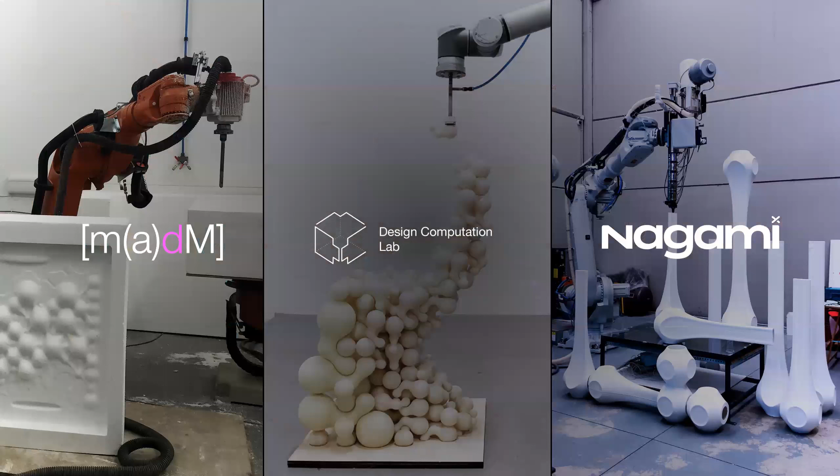Basically, that has always been my aim: to explore new technologies and new design methods through computation. I've done that mainly in my three hats, right, which is my personal practice, madM, the research lab I'm running with my colleagues at the Bartlett School of Architecture, and the robotic manufacturing company and design brand Nagami. The three of them share this interest in technology and automation, and in finding design methods that respond to these advances and push them to the very limit to make architecture more sustainable.

This is a bit of a map of some of the projects I've been working on across these three sides, but they're all interconnected—technology-wise, conceptually, or also in terms of manufacturing, as we'll see in future projects. All of them, and my entire research, revolve around the idea of making the construction of buildings cheaper, more accessible, more versatile, and more democratic, just as digital data.

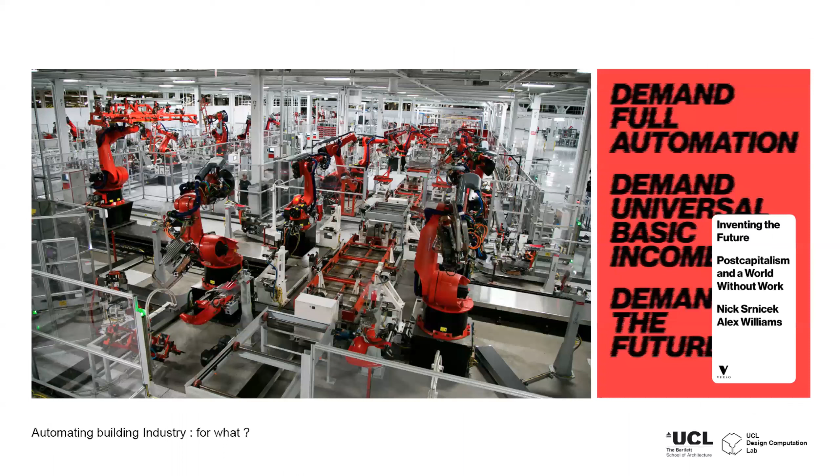This is a picture we've seen already for quite a while, decades actually. This is obviously a robotic manufacturing facility for cars, in this case Tesla.

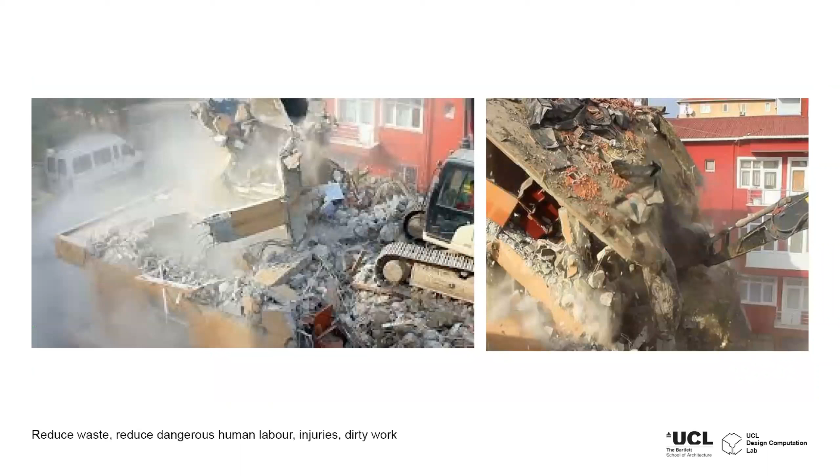However, this is how construction is looking, at least in 99.9% of the cases. It's a very wasteful, dangerous task, and we could consider it dirty work, right? There are also many theories saying that construction of big artifacts like buildings is actually just not made for humans, right? So we need to find a better way to deal with the scale we work with.

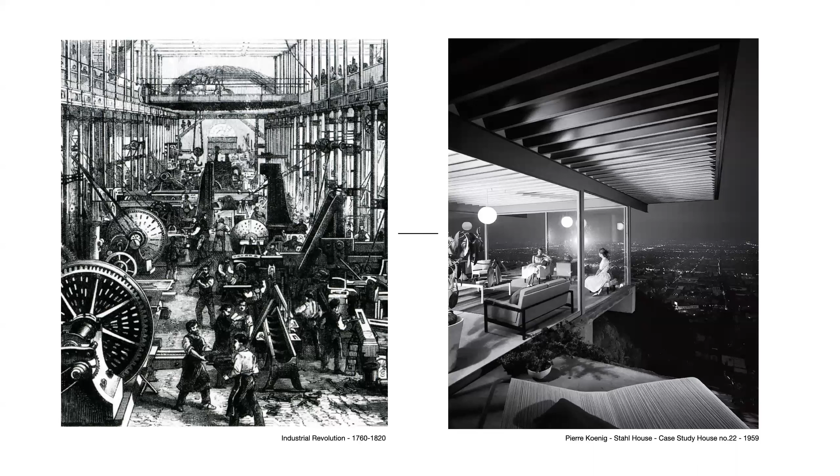So basically, the Industrial Revolution allowed us to repeat pieces and automate, in some way, their construction and assembly. And the modernists took advantage of these developments to create a more affordable construction system. So they could industrialize these pieces, and they would become a kit of parts that you could assemble quickly and safer, and reduce the manufacturing cost of the architectural piece, like in this case. So this was actually not an expensive house to make. It's just the value of land that made it unaffordable afterwards. But that was not the original idea.

In contrast, this is a Tesla factory. So this is the state of the art of technology in general. And this was the state of the art of technology from 1760 to 1820. So basically in the 1800s, this is how it was looking and how architecture was looking together with it, right? This is how technology looks today. However, this is actually the cutting edge in technology in architecture, right?

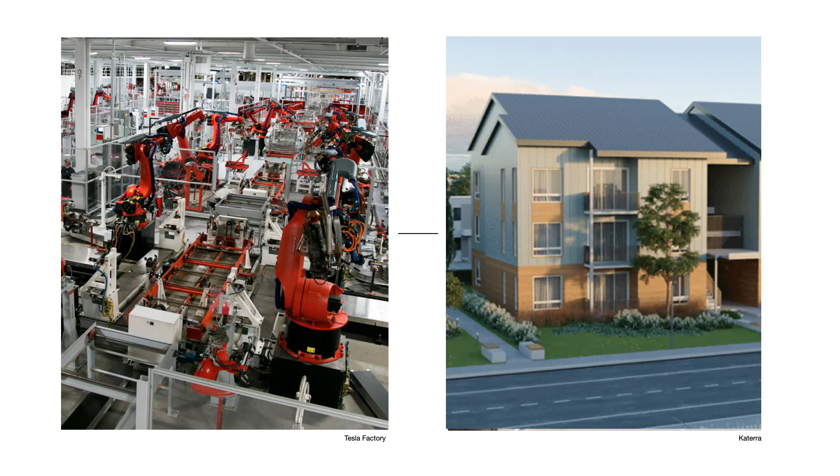So Katerra is probably the only company, or at least the biggest company, that is trying to automate architecture. However, this is the architecture that we're trying to automate. It's the pure American dream. It's the house that we could draw when we are 5 years old, right? This is what we understand as a space that we want to inhabit. Hence, that's what people understand we want to automate, right? But I do think that automation is indeed a design problem. And this is an incredible opportunity to start designing with and for automated processes.

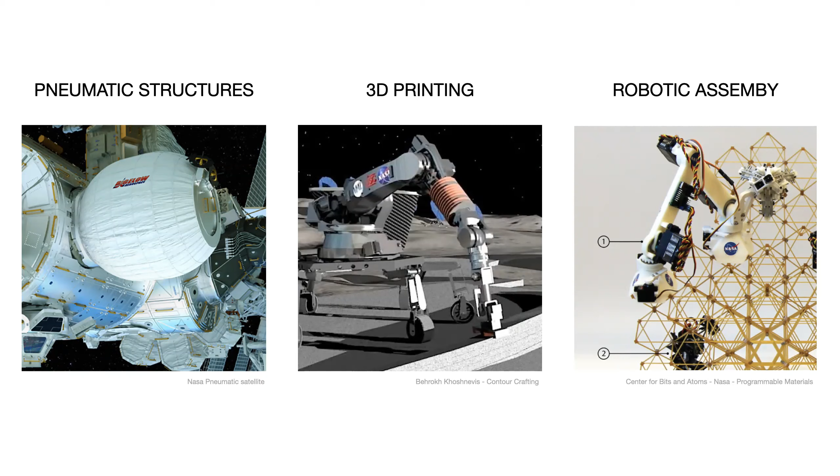Obviously, the highest stage of automation is and will probably always be in space exploration, right? And it has been there for a while. There are initiatives for these three main streams. Deployable structures that you can flat pack and deploy easily, like pneumatic structures. 3D printing, meaning structures that can be erected without humans in hostile environments without having to transport the material or pieces. And robotic assembly, meaning a very densely packed set of pieces that can occupy a much larger space thanks to robotic deployability.

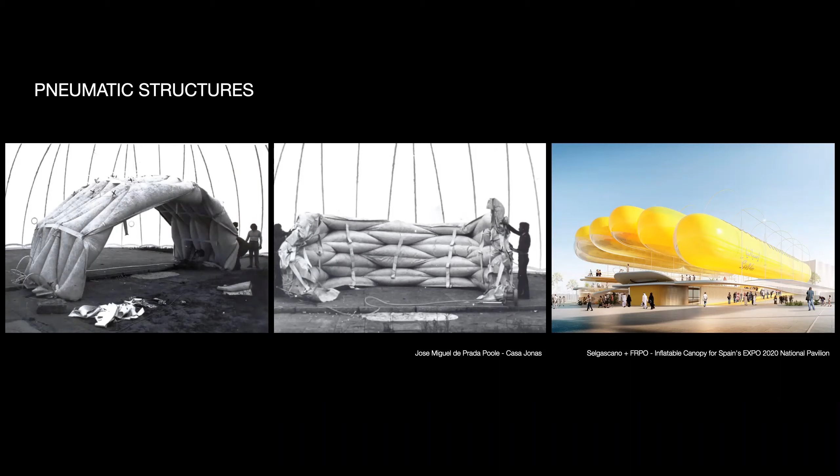And talking about deployability, this has actually been present in architecture, especially from the 60s to 70s. So we have very old examples like José Miguel de Prada Poole, or more recent ones like Selgascano, who are part of these Spanish groups trying to work with pneumatic structures to deploy spaces very quickly, easily, and cheaply. And that's something that I worked a lot on, especially at the earliest stages of my career, 10 years ago, developing software for designing, creating and controlling structures that could be very easily deployed.

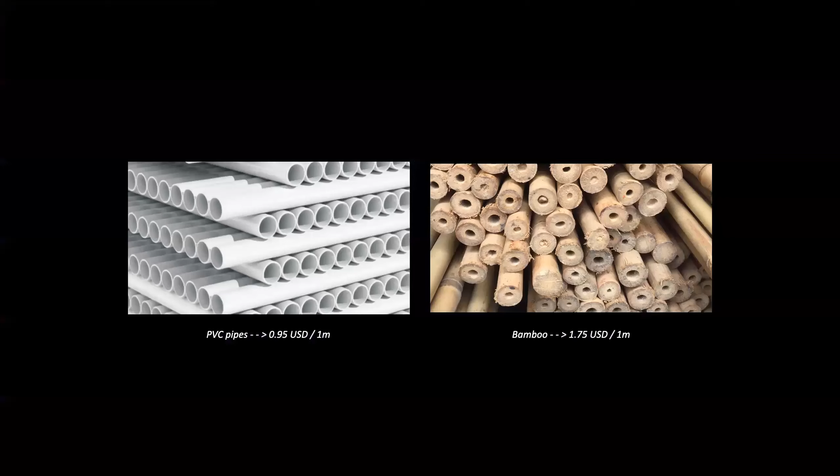Like in this case, this software is allowing you to design with a flexible membrane, but then it's also rationalizing the flexible members that would support this membrane. In this case, very, very incredibly cheap and accessible or available material, like PVC pipes or fiber rods, or even bamboo. And I've been playing out this idea of the discrete pieces that can be basically repeated and connected differently to create heterogeneity in the architecture, but to streamline the production and material efficiency.

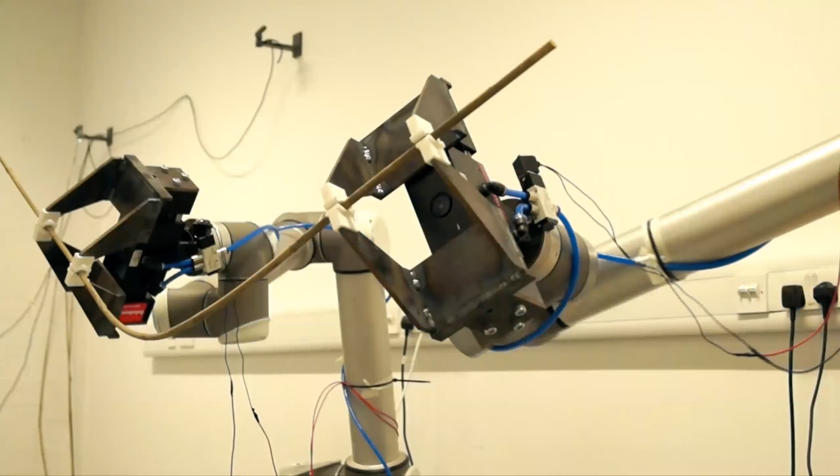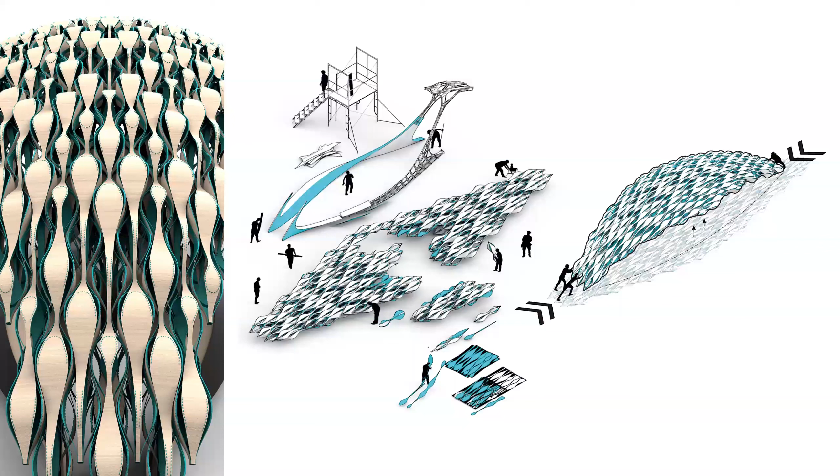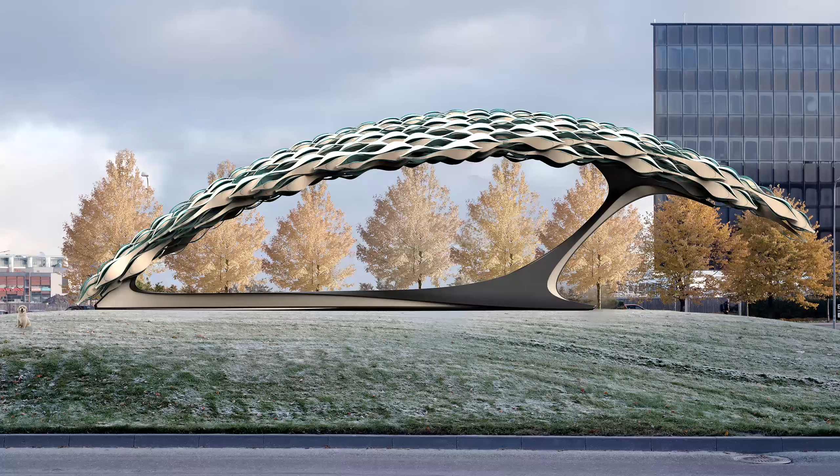Also with this idea of deployability, I've been playing around with pieces that could be very, very easily manufactured and repeated. But again, thanks to their flexibility and their connectivity, they could conform larger surfaces and erect larger structures, such as this pavilion that I did for the Tallinn Biennale competition. Unfortunately, I didn't win it. I was actually going to build a similar version in Abu Dhabi, which just didn't happen because of COVID, and hopefully we'll recover it in the near future.

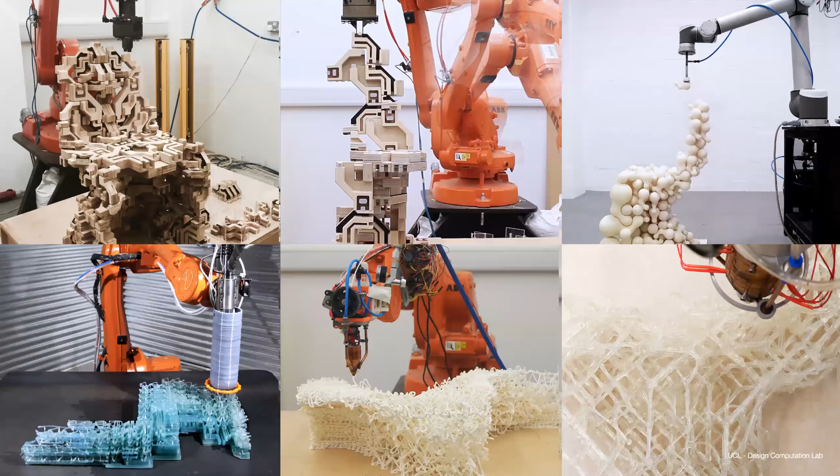But this kind of material organization is something that I explore with different manufacturing methods. Sometimes it's pieces that you connect, sometimes it's pieces that you compute and print in one go. And I'll go a little bit farther on this, especially introducing the work that we're doing at Design Computation Lab, which focuses on elemental particles for the automation of architecture. So these are different assembly processes or fabrication methods using robotics.

But what is important is that to automate these processes, you need to conceive the elemental particle of those structures as something that could come from automation and that could be easily automated. That means if you create a limited number of pieces with a limited number of assembly possibilities, it is much easier to instruct a machine to follow that limited number of steps. And that's what we do.

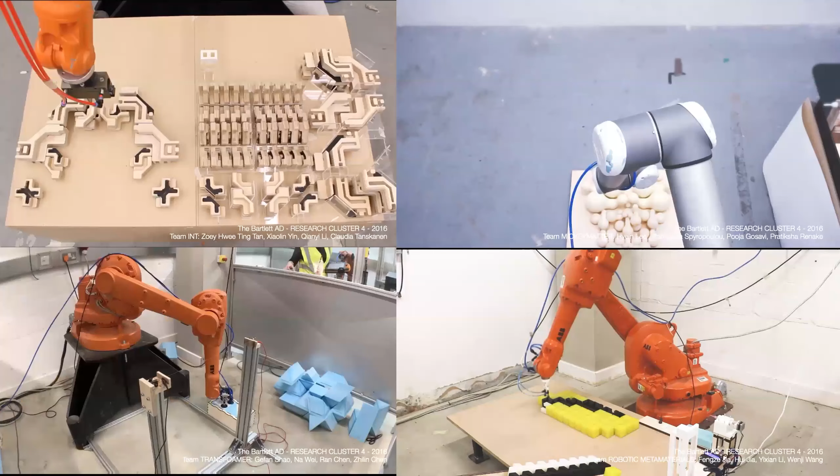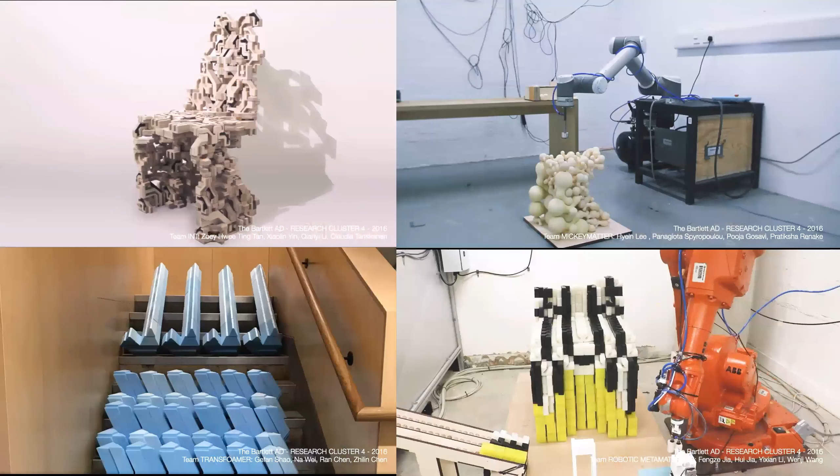This is how the studio normally looks, except these days, when it obviously looks empty, and the robots are just missing students playing with them. But you can see different aggregation methods, and to be honest, they all kind of revolve around the same idea and a very, very similar syntax, independently of form, right? There are pieces that are conceived to be grabbed by an end effector, by a robot, and that could deal with the possibilities that this robot would have to assemble them together into larger structures.

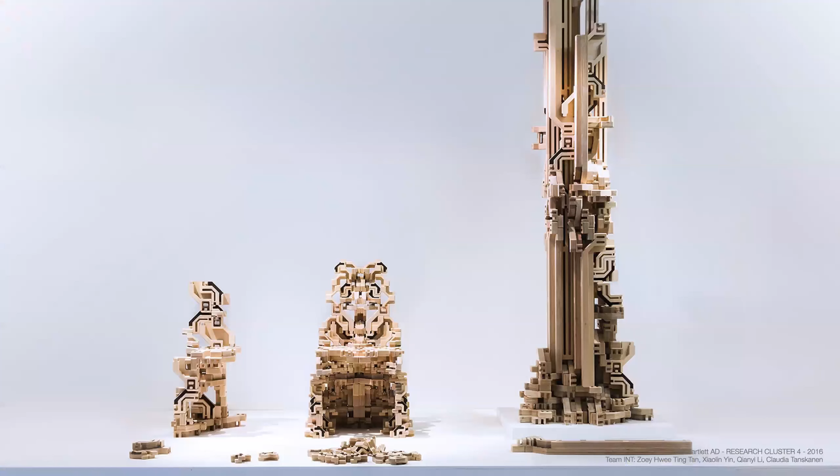And we test that in the scale of furniture, but also in the maximum scale that we can achieve within the limitations that we have, but aiming to picture what this architecture could be in the real scale, right? So what we are testing here is a part of a larger system rather than an end product. Right?

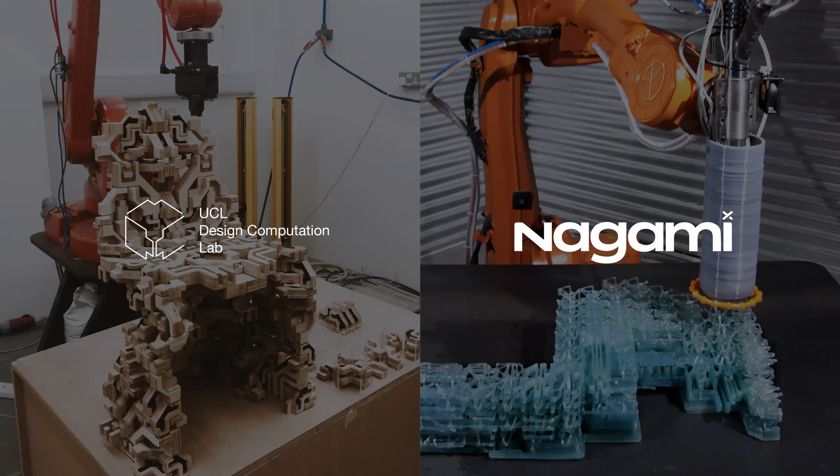So in parallel to the research that we were doing at the lab, back in 2013, we started playing with the idea of having a parallel robotic manufacturing facility that would actually take some of these processes, especially 3D printing, to a commercial level. So in 2017, I finally got together with my brother and one of my best friends and started a crazy journey with these three main objectives. We wanted to achieve a high level of automation in design. We wanted to take advantage of distributed manufacturing, especially associated with 3D printing, and to perform a very, very short and sustainable production chain.

So this is, in a way, and this is not just what we're doing in Nagami, but 3D printing in general, is giving a completely new step to what we've been using until now, and we keep using, which is the assembly line, right? And especially that goes together with a centralization idea. This started with Henry Ford, and that allowed to reduce manufacturing prices of automobiles to the very minimum, just because of the specialization of every single part of this production chain.

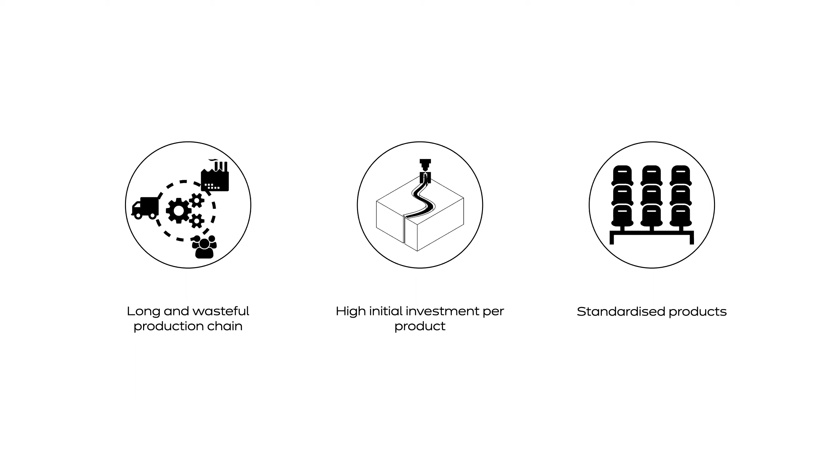And that leads to standardized products, right? So, because you've done this investment, and you can only produce this one product economically, you are tied to that product forever. 3D printing, and this is our motive in Nagami, right? We can do a very, very short production chain, which includes a circular economy. So we can recycle the material that we produce. We can do on-demand production, right?

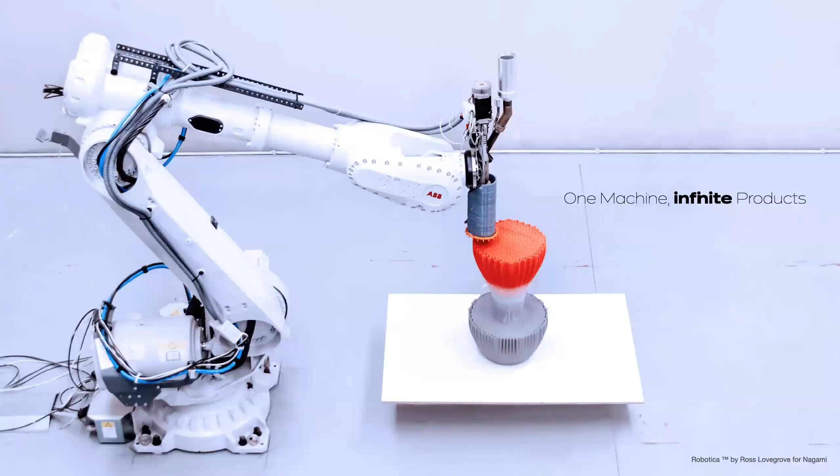A 3D printer doesn't really care so much if you print one part and a completely different one right after, within limitations, and I will explain that a little further. So you have a level of customization that you can introduce in the product, and you can produce a different product every time. That is a high versatility that you don't have in the common long centralized factory. So this is our equivalent of this image right now. It's just one machine, infinite variation of products. So it is the complete opposite of the traditional idea of manufacturing products and architecture.

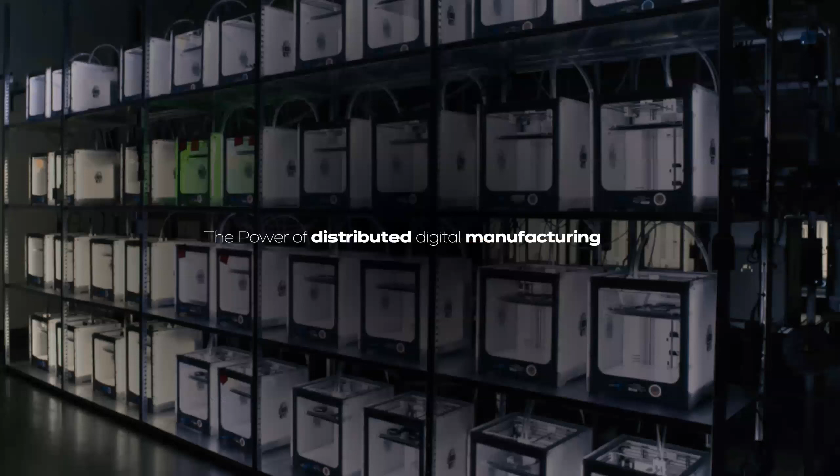And so we aim in the near future also to start taking advantage of the power of distributed digital manufacturing. Meaning you have one digital file that can be distributed instantaneously all around the world. And if you would have one 3D printer per country, or one per city, you can simultaneously produce that file. At our scale, that is still something in progress. But at a smaller scale, it has been very recently demonstrated widely, and is used in the world as the largest connected factory.

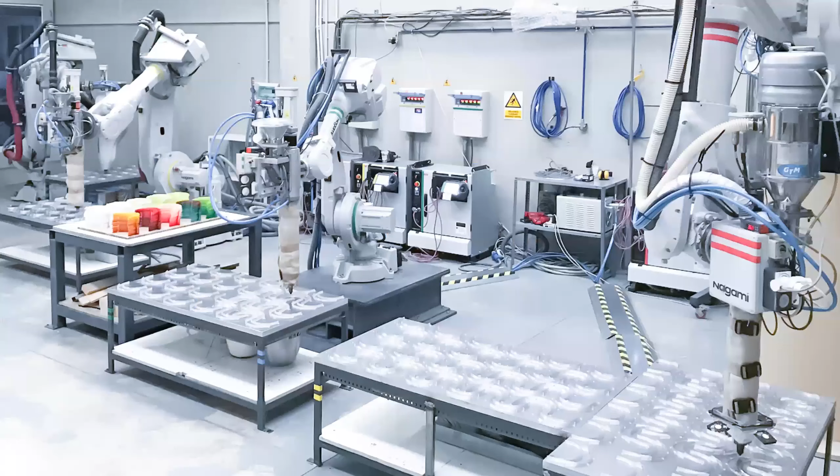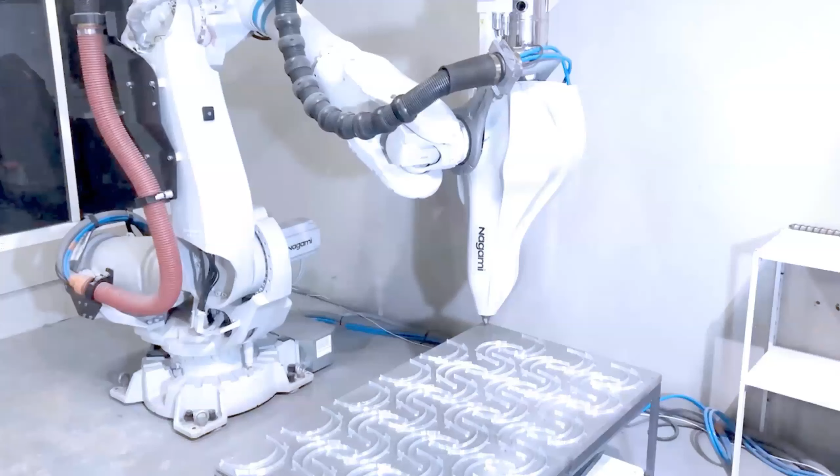We jumped on board with this call immediately and repurposed our factory in 24 hours to produce face shields. The advantage that we have as well, and so we made a redesign of the Prusa open source model.

But because of our robotic manufacturing methods, we could actually print them in like 1 every 5 minutes, right? That is around 7 times faster than a desktop 3D printer. So this time, actually, our robots were not just allowing us to make bigger products, which they normally do, but they also allow us to produce much faster. And that was a crucial advantage that we had to deal with this situation very quickly.

So we produced already more than 6,000 masks and serve hospitals in the entire country. And we work with an unfortunately limited material, this is again something inherent to the technology. Plastic, right? Plastic is everywhere, and unfortunately, it will always be.

And in 2018, to give an example, 359 million tons of plastics were produced. 1/3 of those for single-use packaging, and only 10% was recycled. So that means that every year we are producing tons and tons of material that if we don't reuse, it will actually generate an incredible waste.

And the obvious goal of this process is people were feeling safer, and we were feeling safer because they were. We keep on receiving lots of these pictures, and we are extremely grateful to them to keep fighting in these difficult times. But at the same time, it's actually giving a lot of ideas on how digital manufacturing is changing the way we produce, the way we think about products, and the way we establish our production and design methods.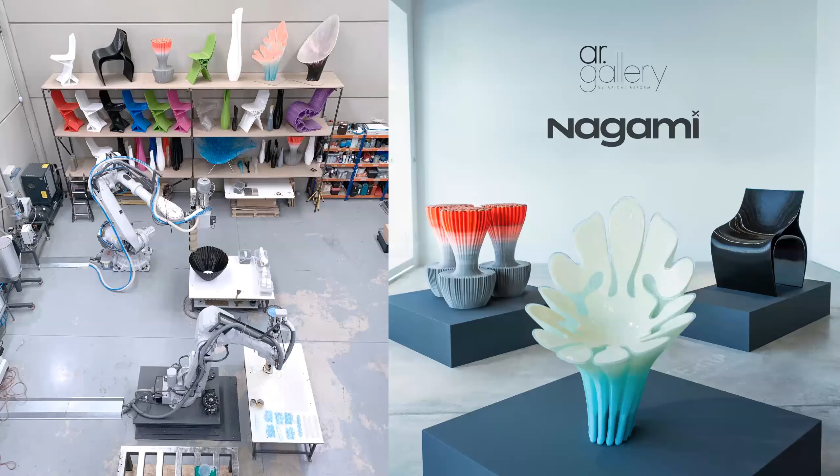And I think that's where 3D printing is starting to change the way we conceive design, right? So if automation, as I mentioned before, is a design problem, it's mainly a design opportunity. And the main question when you're starting this exploration is actually how to design for and with automation. So this is how our previous factory looked like. And we've been working a lot in this scale of products, but really exploring this plasticity of the material in many different ways.

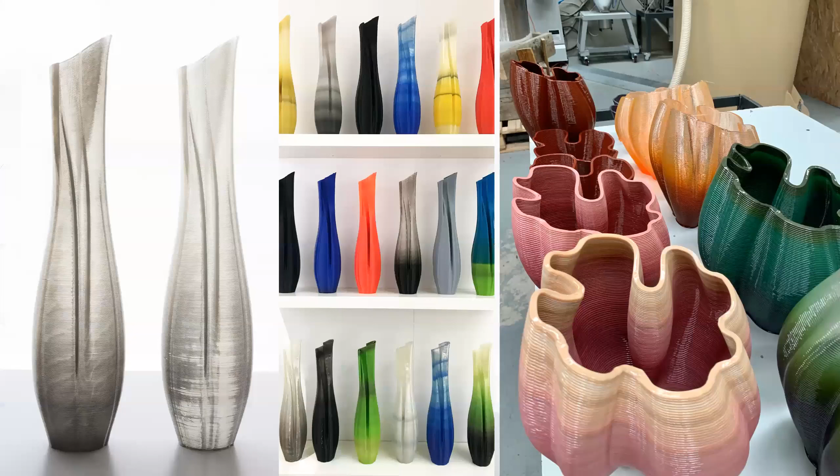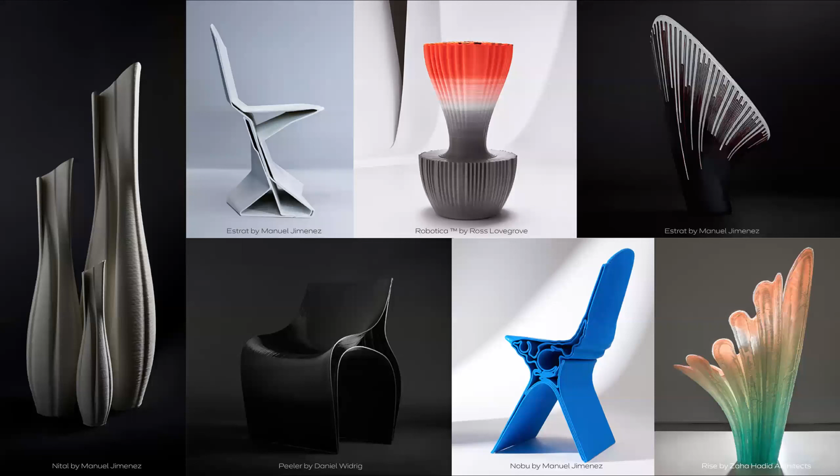So we play with our manufacturing methods, for example, changing the pigmentation in the extruder. We work very closely with the robot to create objects that are every time a little bit different, right? So sometimes it's just us being next to the extruder, feeding different materials, playing with different opacities, and so on. And those are things that are implicitly inherent to 3D printing methods. So these are some of the products that we have currently in the catalog.

And I think what is important, we didn't invent 3D printing, and that wasn't our intention. But 3D printing was, until now, at this scale, limited to pieces for galleries, museums, and collectors. And what we are trying is to optimize this process and exhibit its potential for changing design, but generating a range of products that are actually accessible to the public.

Even if we have some of those pieces, the pieces on the screen are actually more for collector editions, but some others are actually accessible pieces of furniture that we can mass produce and that we can put in everyone's house, right? Which was something completely inaccessible to 3D printing before.

We launched the company in 2018 with 4 pieces in collaboration with 3 of our colleagues and favorite designers ever. The first one was Daniel Widrig, who was working on basically pushing the organic feeling of this surface to the limit, right? So this is really playing with the maximum angle that you can print without support material while keeping this extreme efficiency.

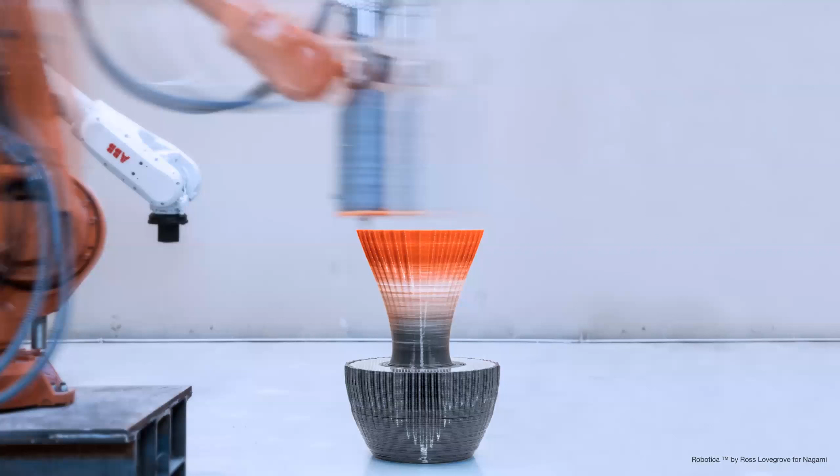So for this very large armchair, we can print it at an incredible speed, just in 6 to 8 hours, which was something really unachievable before. Some of our other pieces, and I'll go through them in a second, are printed in only 3 to 4 hours. That means 4 times faster than printing the same piece, or actually it's even faster than printing the scale model of the chair.

Like I have one here. This guy here, where is it? Well, you can't really see it in the screen so much. This guy here took actually longer to print in a MakerBot than printing the real scale chair. And I think that is giving us incredible opportunities.

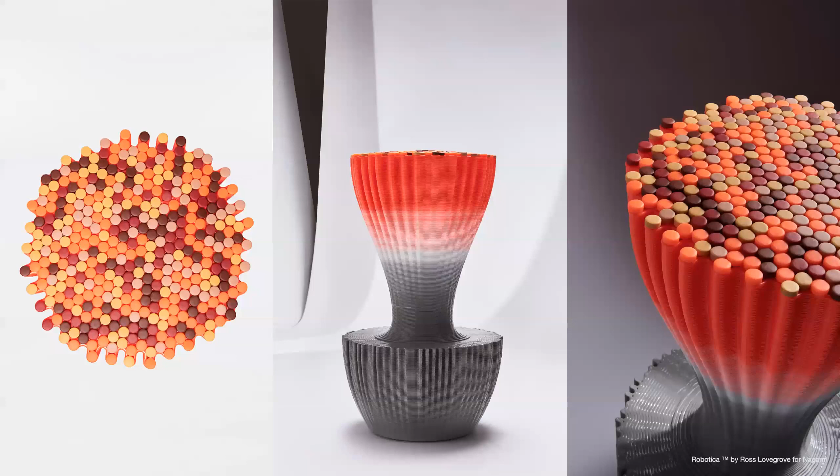We work very closely with Ross Lovegrove, who we still work with in very exciting projects. And Ross was playing out this idea of a gradient, of different pigmentation, of uniqueness. So every one of these stools has its unique kind of transitions that depend on the way you are crafting this object together with the robot. At the same time, we were working on the introduction of other materials, like for example, these silicon plaques.

The work we did with Zaha Hadid Architects is obviously exploring the form to the very limit, which is something very characteristic of their work. So these pieces are varying dramatically from the back to the front, which pushed us to create a gradient in the deposition of material that goes from 0.5 millimeter to 9 millimeters in a single go.

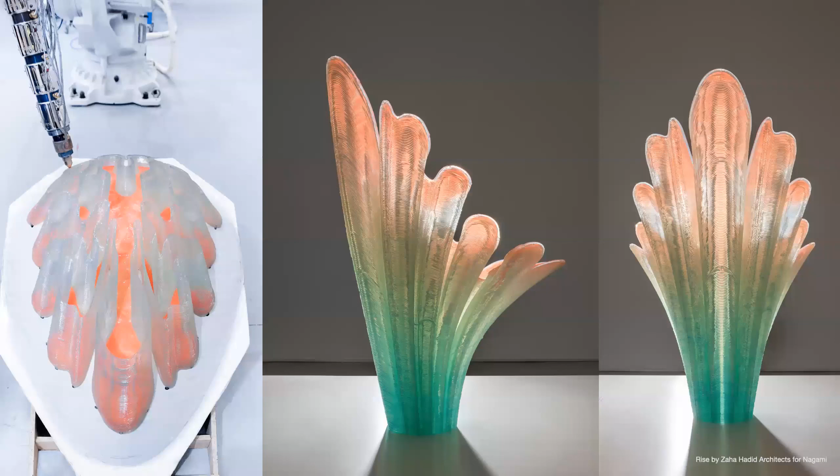So 3D printing is not anymore this kind of horizontal slicing, but it's actually a 3-dimensional deposition of a varied thickness of material. And that is where these lines that you see become part of the design process, and you design for and with the lines. And for us, that is a magical transition, since we are not only acknowledging that the material gets deposited in these thick linear fragments, but we are trying to push that as one of the properties of these objects.

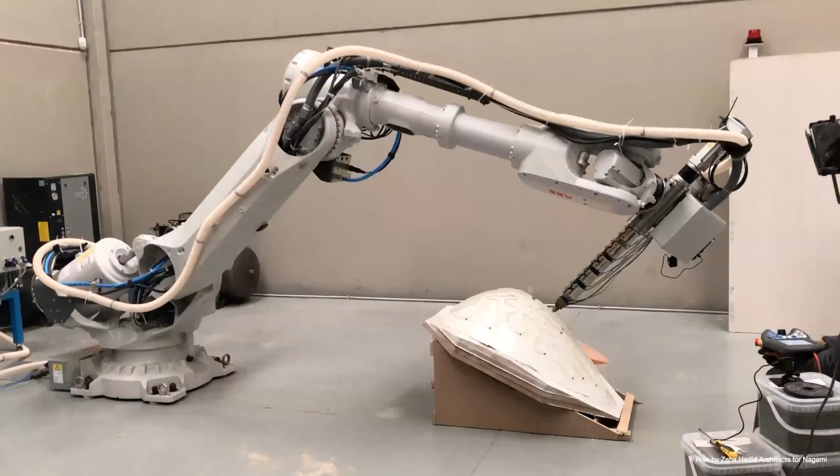So we exhibited these 4 pieces in Milan Design Week in 2018. And as I mentioned before, these were really pushing the technology at the beginning. So you can already observe many differences with what would be a scale-up version of an FDM conventional 3D printer. There is no 2-dimensional slicing, and the robot needs to find the perpendicular position to this printed line to extrude the material in the right way, and it's also extruding the material in this gradient of thickness.

So there's much more to 3D printing than just getting any object, slice it, press play, send it to print, and that's it. So you can see this kind of organic effect of the material just running through this object without having the commonly found horizontal lines in printing.

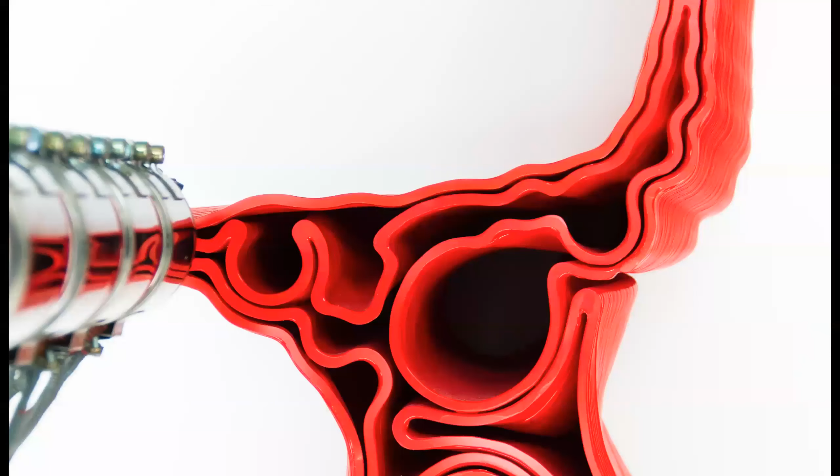So as I was mentioning before, in just 3.5 hours, you have an object that you can just take. It doesn't have any post-processing. You take it, flip it, and sit on it. And that is for us a very magical moment. So we're producing some of these objects also, again, in collaboration with Parley, introducing their ocean plastic.

This is making our already sustainable production chain even more sustainable. We have a circular economy where we can take any prototype, strip it down again, and reinsert it into the production chain. But now we're also using recycled material from the ocean in that chain, and I think that brings a lot of new ideas on sustainability and circular economy that we're starting to explore further with Parley in upcoming projects.

So the objects we produce, as I mentioned, sometimes are still pieces for museums and exhibitions, but I think this is the magical moment, the game changer in 3D printing. When you start seeing 3D printed real products in people's homes, I think that is an important inflection point in the way we conceive objects that we consume normally, not only for these special exhibitions and occasions.

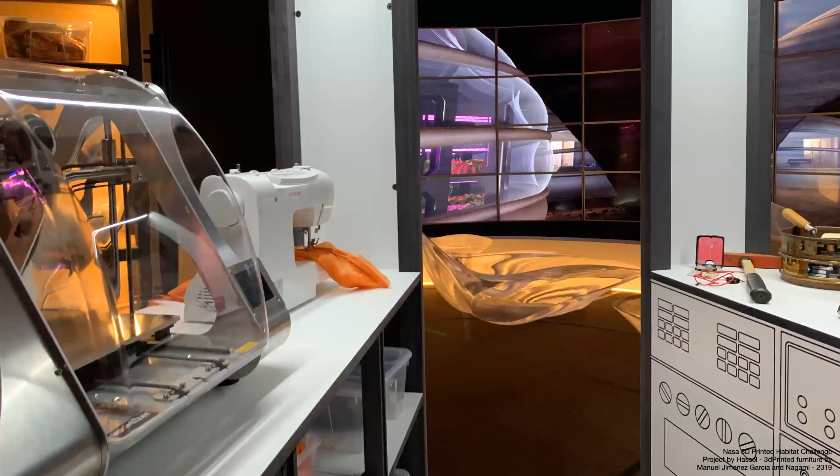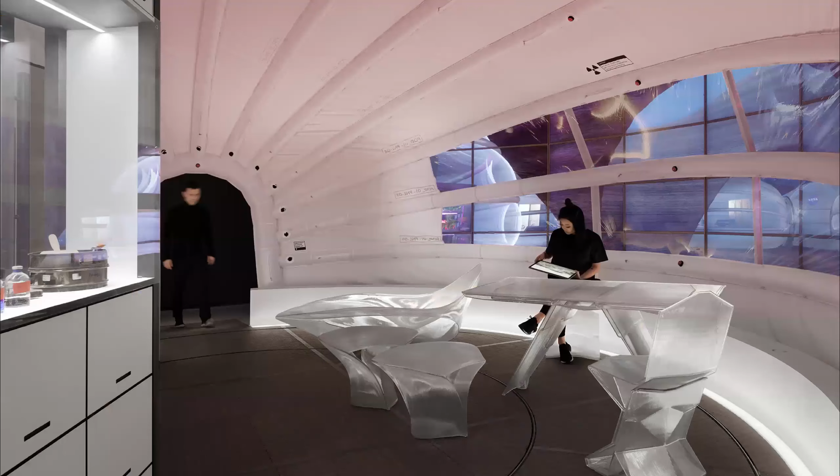That is something that is obviously not only important and advantageous for a Mars habitat, but is also a fundamental change here on planet Earth. This was the Earth version of the Mars habitat that was exhibited at the Design Museum last year, where we were testing the performance of our products.

As you've been seeing throughout the entire presentation, we check most of our methods at the furniture scale, and this is nothing new. We are all architects, and architects have always tested ideas in furniture pieces. You can see a very obvious example in Gehry, but every single one, like Mackintosh, Frank Lloyd Wright, Gaudí—they could investigate those ideas especially in chairs, because they have these structural requirements and need that performance.

At the same time, there are smaller objects where you can check how your systems work and envision an idea of how they would work at a larger scale. So even if our factory has mostly been looking like this, it is also starting to look like that as well.

This is a piece we just recently completed with Ross Lovegrove, that is 3.5 meters long and printed in only 48 hours in a single shot. This is unprecedented. It's a piece that is changing opacities, changing colors, continuously printed in an incredibly short amount of time, and the next piece could actually be extremely different. That is obviously a game changer at this scale with the introduction of 3D printing.

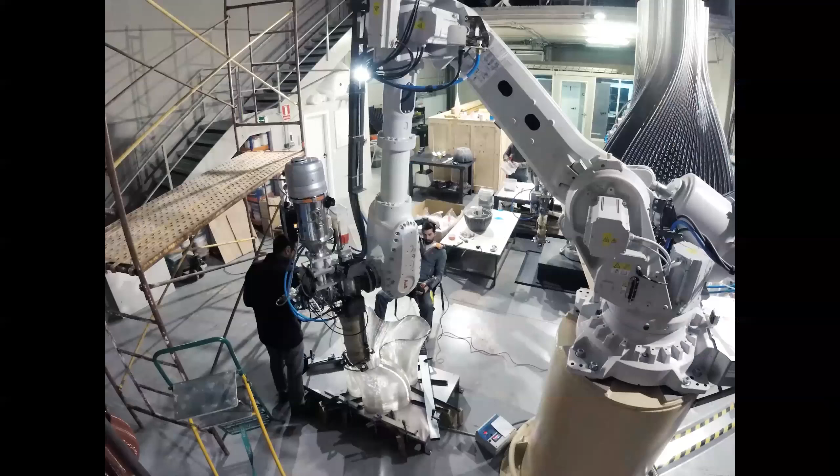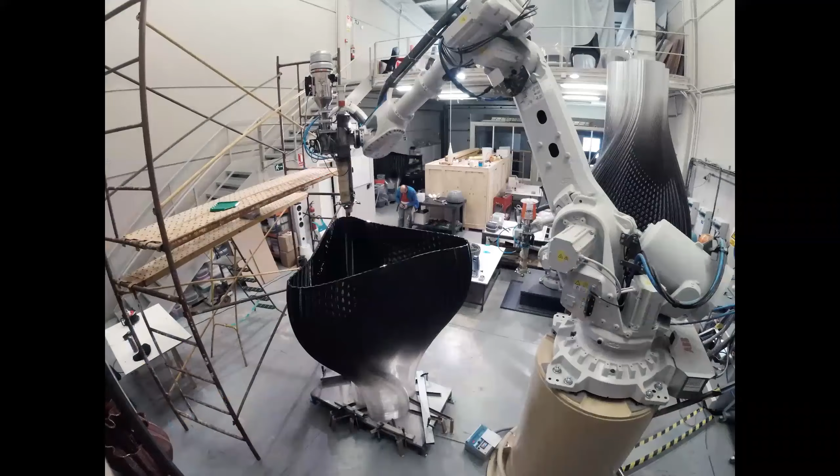So that is the 48-hour shot printing this object. This video is not online yet, so I can play it again—it's probably going in very slow steps, as you guys can see right now. We're now completing the press release to publish this project very soon.

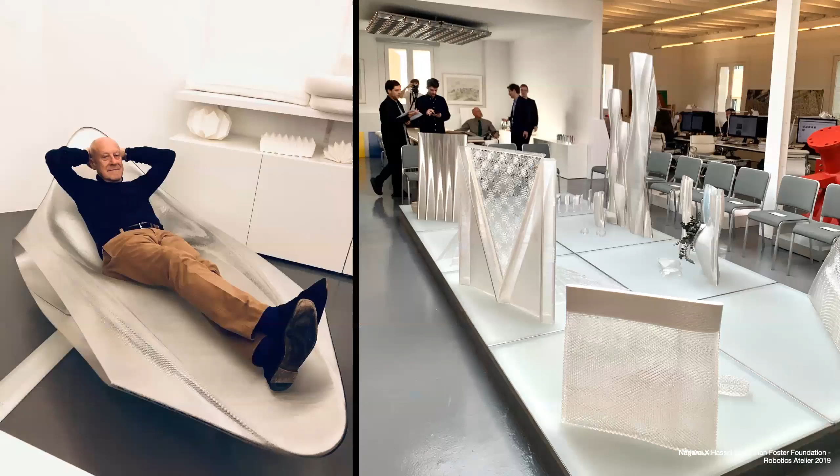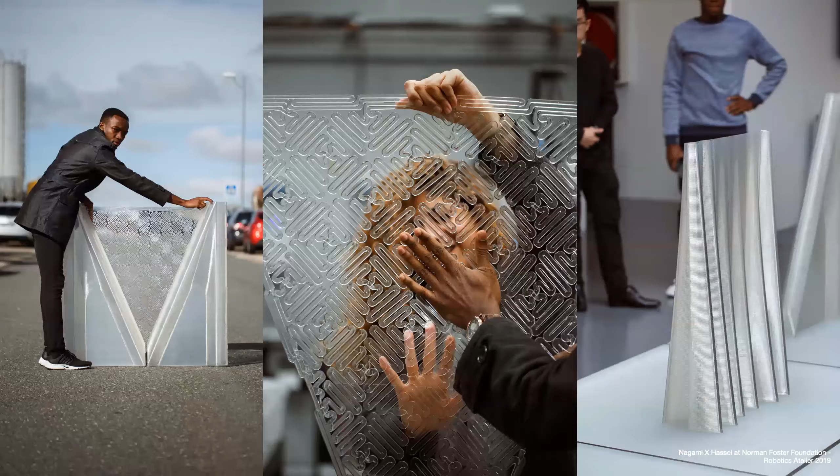At this scale of architecture, we've also been collaborating with others, such as here with the Norman Foster Foundation, with Xavier De Kestelier, trying to see what an architectural 3D printed piece would be. This was obviously a very exciting week, getting feedback from Sir Norman Foster and exploring these very different ideas on what 3D printing could bring to a facade system, to a structural system—could it be used as a formwork to be cast? All these questions are starting to emerge in the domain of architecture, and for us it's incredibly exciting.

This is really approaching from a completely different angle how we can or should 3D print architecture. I'm saying a completely different angle because these were the very first examples or ideas about printing at an architectural scale, which was Contour Crafting at USC. It's obviously a very interesting development, but it does pose some questions: can we 3D print a building in one go?

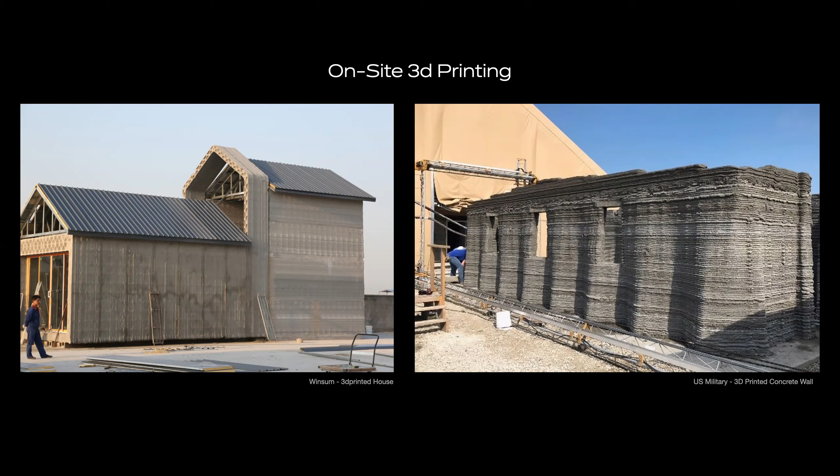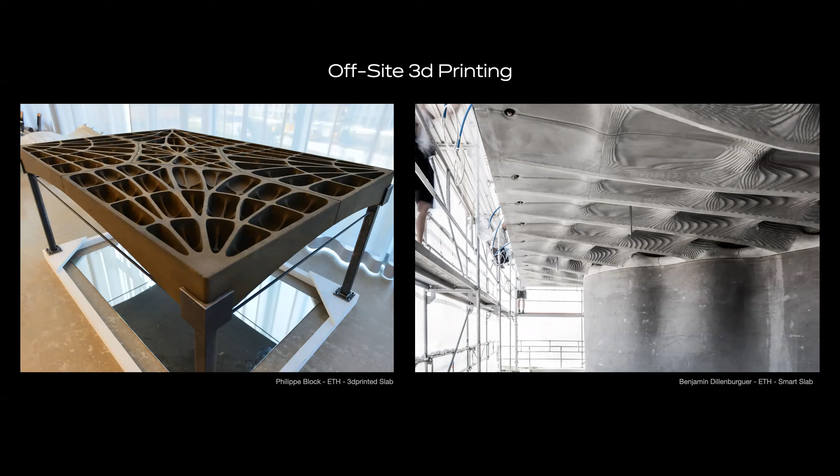Do we really need to develop a large-scale 3D printing method to print something that would look like any other house of any other material? Other more interesting examples are happening in research groups, such as Philippe Block's or Benjamin Dillenburger's at ETH, with offsite, very controlled printing, and then dealing with the assemblage of these 3D printed pieces on site.

So let's say, and I will use some of these examples to illustrate this, these are the premises of 3D printing: on-demand production with minimal waste. You don't have stock, you just get asked to print something, you print that, you get asked to print something else, you print it again. A very short production chain with a low carbon footprint, which we've been talking about in previous slides.

The reduction of parts, right? You can integrate parts within the whole that you print. And a high level of customization.

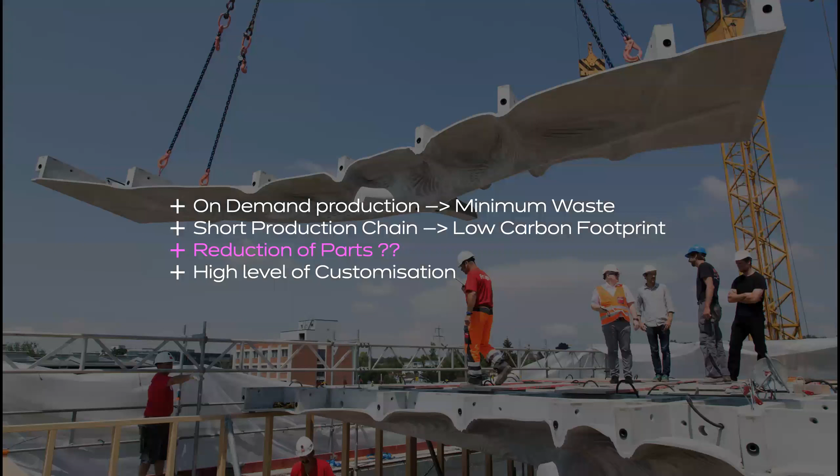Well, the reduction of parts is something questionable. Obviously you can't print the entire world in a single part. Architecture will always inevitably be inherited to the problem of parts and assemblies, as you can see in the way they are assembling this 3D print.

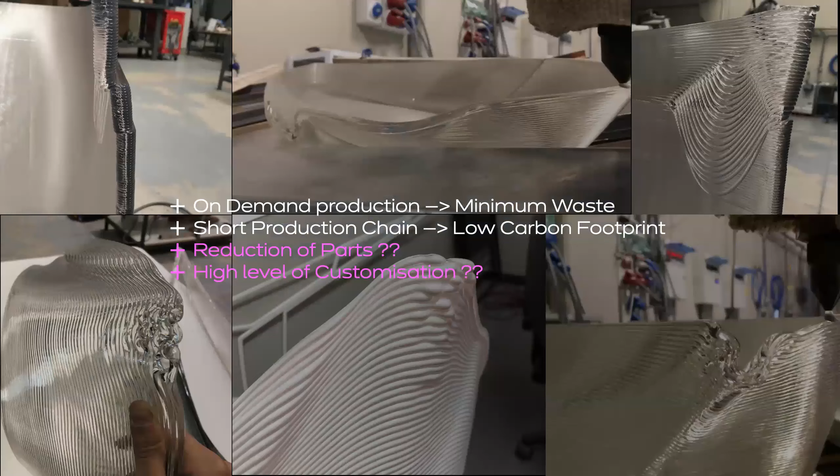High level of customization: these are some of the tests we were doing for printing the Design Museum chaise longue. As you can see, the material can fail, the technology can fail, and it actually requires a long time prototyping to get to the right definition of a product. So for making this guy here, we actually needed 15 different prototypes, 495 kilos of plastic, 300 printing hours, and 3 months rationalizing and engineering these pieces.

So you can customize it, yes. However, there are certain parameters that, if you want to push the limit in every one of those pieces, you will need to take into account, and they will become a product development process. So I would argue then that perhaps 3D printing is actually not the ultimate tool for variability. However, it actually has other more interesting advantages.

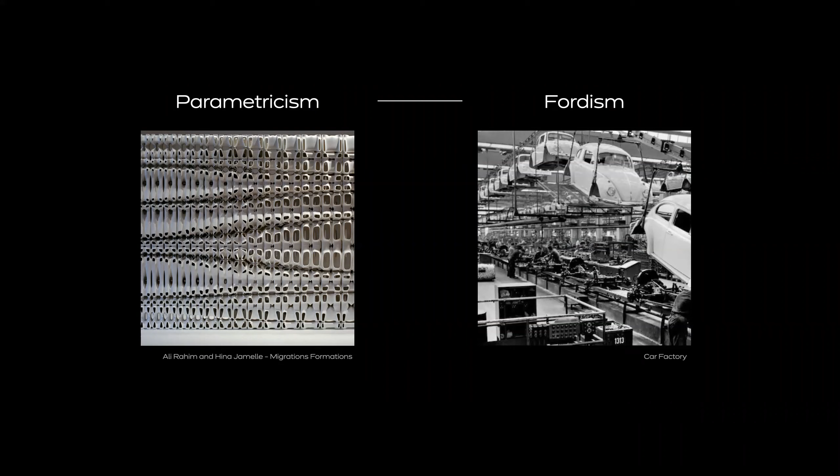Whereas 3D printing has always been associated with parametricism, making different pieces over and over, completely opposed to this idea of Fordism, of repetition of pieces, I actually do think 3D printing is somewhere in between. You can produce different pieces, yes, but within certain parameters, and you need to get to the right one so that you can repeat it without going through a new prototyping phase every time.

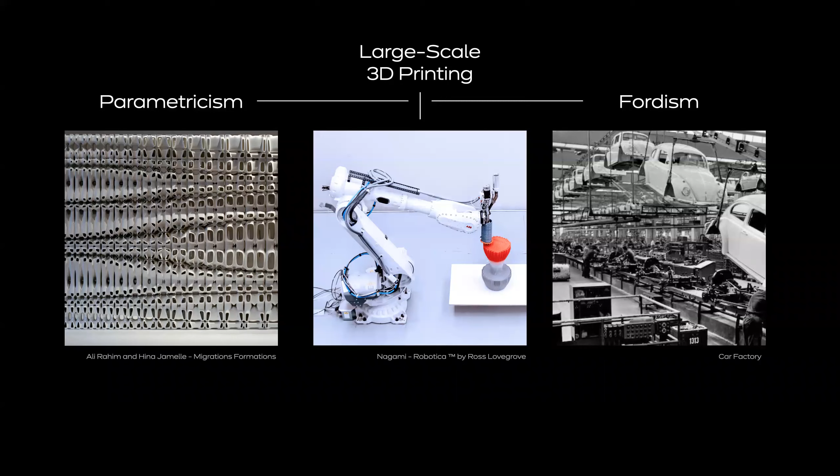I think this is a very interesting balance, and it's starting to give other design spaces for 3D printing, such as doing very short editions. You can create a complete new piece from scratch for one building and repeat this piece, or you can make a piece that has a level of variation but that works within a formal domain you can control through a very efficient prototyping phase. I think this is starting to become a new field for exploring with printing.

What it requires mainly is a serialization of errors. The last thing you want in a 3D printing environment is to realize there was a problem with the geometry, or that the angle was a little too steep, so that the print fails after 48 hours printing. So I think there is an interesting aspect of design, going from prototyping these pieces, that is starting to generate its own kind of natural processes of making and formally expressing themselves.

And with this aim to serialize errors, we utilize a discrete approach in the piece we did together with my lab. This is a collaboration for the Centre Pompidou, the voxel chair, that uses a single piece repeated throughout the volume.

This piece has two kinds of pieces, right? One giving more density, one leaving the parts more porous, so they can create this gradient of strength and opacity that responds to the structural requirements of the object.

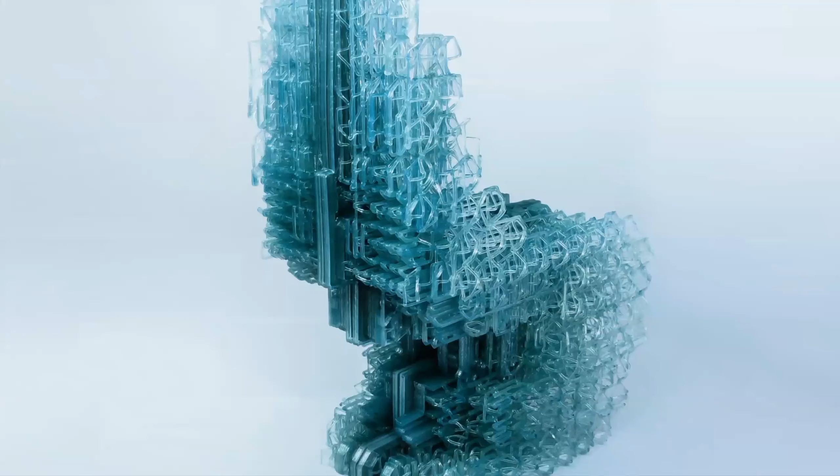Since the entire object is made out of these two different pieces, you just need to prototype those line fragments before, in every single rotation. You know the print will be successful at every stage if it's all composed out of this single line you've previously prototyped.

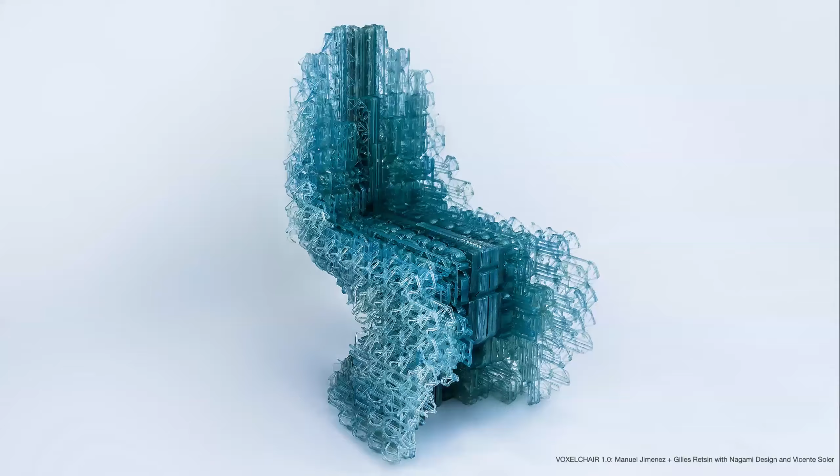I think for us this was a very interesting process, finding out the right workflow between making, designing and programming this expansion of this line into a larger object. These are some stills of the voxel chair version 1. It is part of the permanent collection of the Centre Pompidou.

At a different scale, but also aiming to minimize errors and optimize the prototyping phase to the maximum, we've been dealing with larger pieces that could be altered but somehow repeated throughout an object.

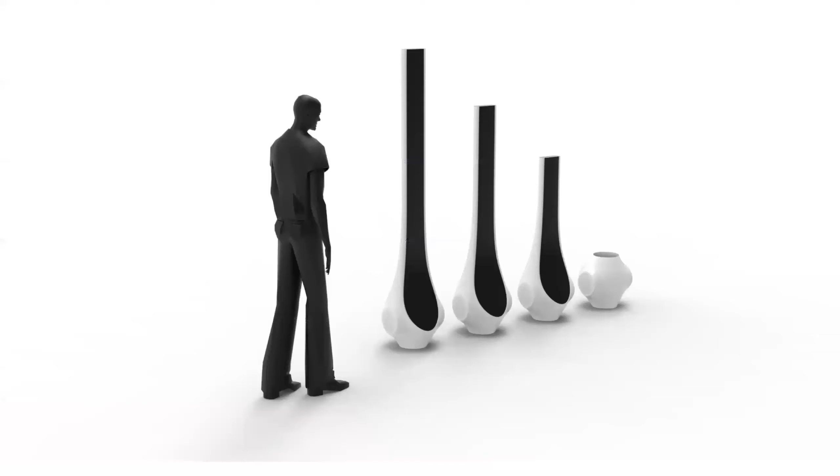We explored this method in the piece we did for the V&A Museum called Nectary, which is basically making a variation of a single piece. Once we prototyped this small guy you see on the right, we knew we could make it longer or shorter, but we had the security it would actually work after the prototyping phase.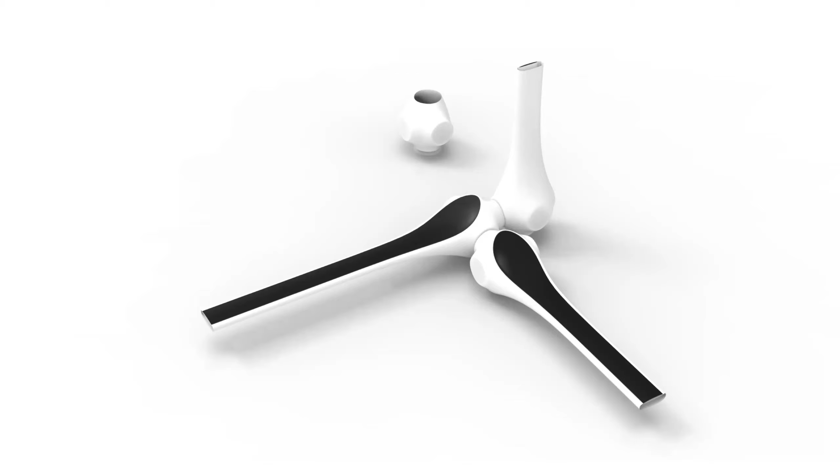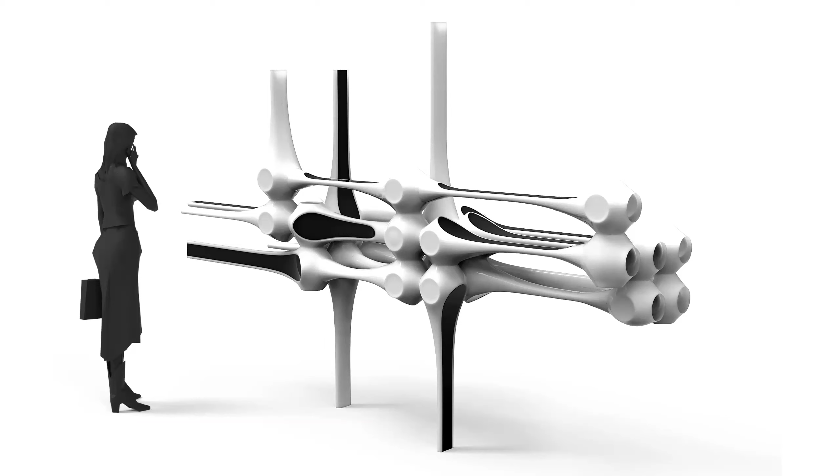For us, that was fundamental to create a piece of such a scale. If every single corner would be different, we would be still prototyping today. I think that was a very successful approach towards this question of the deployability of a larger structure in the museum.

It gives you this flexibility of spatial configurations, so you can go from a piece of furniture to something much larger. That is what I proposed to the museum at first. Obviously, they said they didn't have a space so big.

This is something I continuously explore in most of our projects, which is how to computationally arrange these combinatorial processes and allow this intervention for how to combine these pieces in different structures.

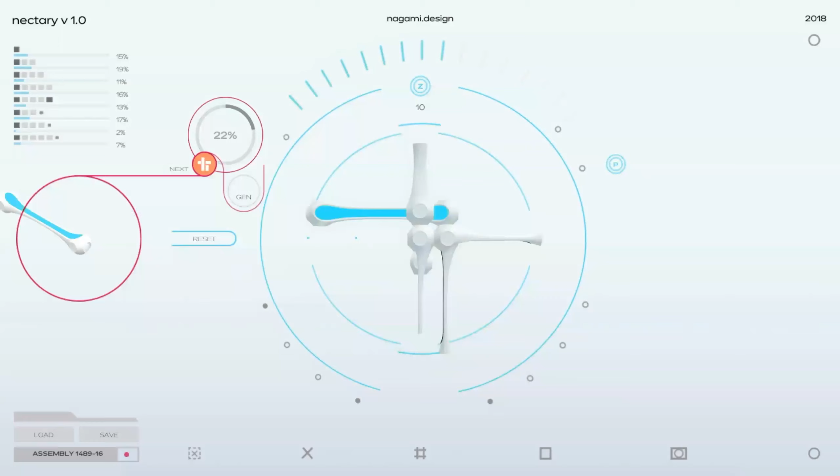So this is a software we developed to deal with these pieces. You can put structural requirements or the volume you want to fill with pieces, and it will automatically generate the best arrangement for you.

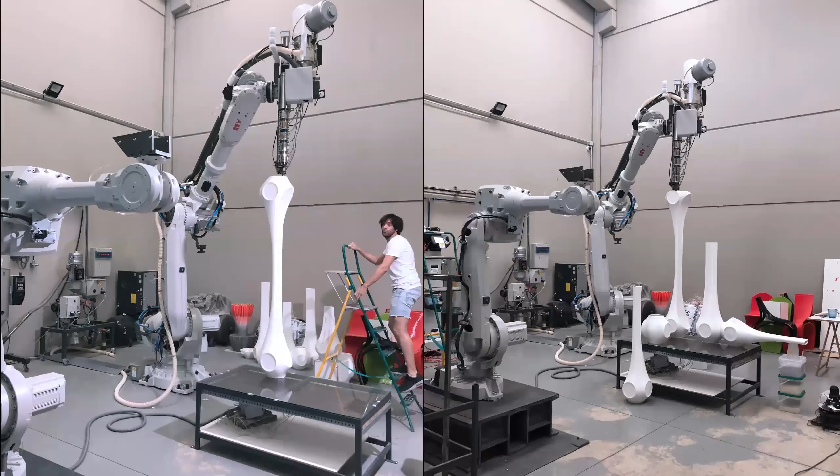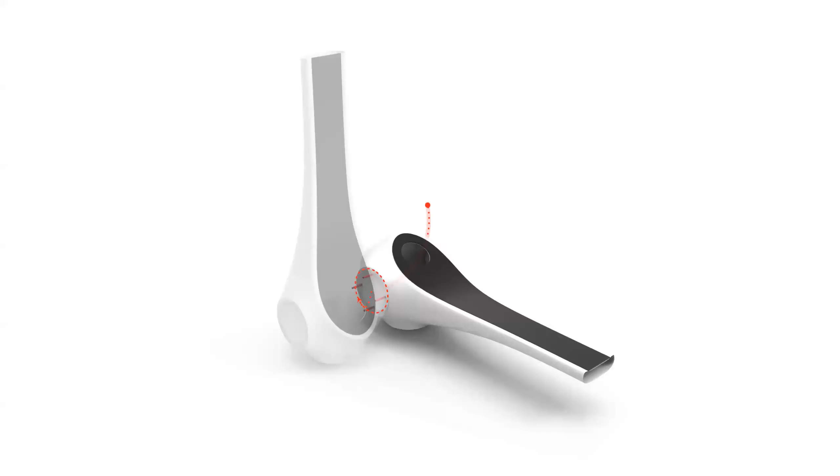So this was the production. It was actually something incredibly fast. We were prototyping then the connection between the pieces, something extremely straightforward. The pieces were designed to be simply printed and then very simply connected as well.

So that is how we assembled this in the museum, very, very quickly, in just a couple of hours, and then we disassembled it. This is the overnight version of this assembly, with all the pieces going back again to a truck, shipped to Prague, and then assembled again in a different configuration.

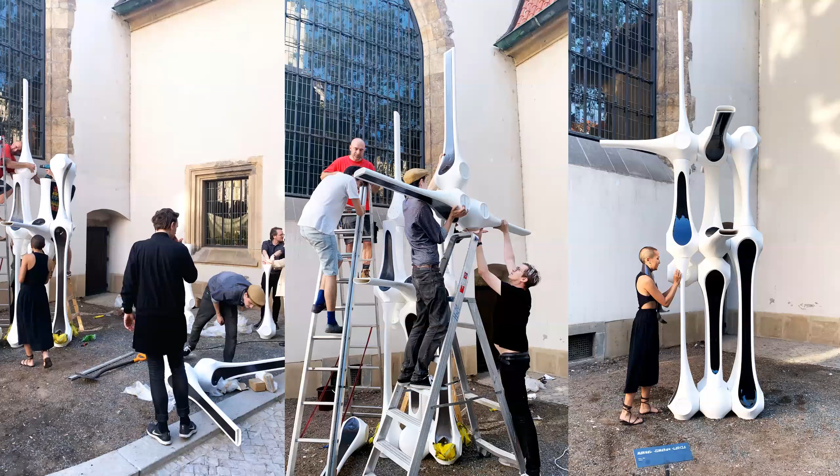This basically leads to the last project I'm going to show, and this is really work in progress. These are actually just the earlier sketches, but so you have an idea of where we are going towards in Nagami as well.

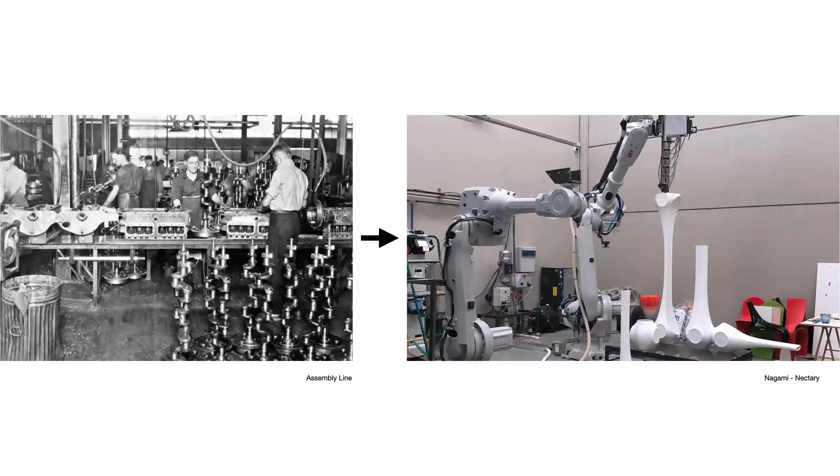This is the 3D printed house, so it's basically taking advantage of this system to produce a habitable and inhabitable space, based on this idea of transforming the assembly line into this very compact part producer, which is our own 3D printing cell.

But it's also really rethinking shipping for prefabricated architecture. Some of our heroes who were basically thinking about design and production simultaneously, like Jean Prouvé. He had his own factory for furniture, but was thinking about having to ship these Maison Tropicale houses in a large aircraft.

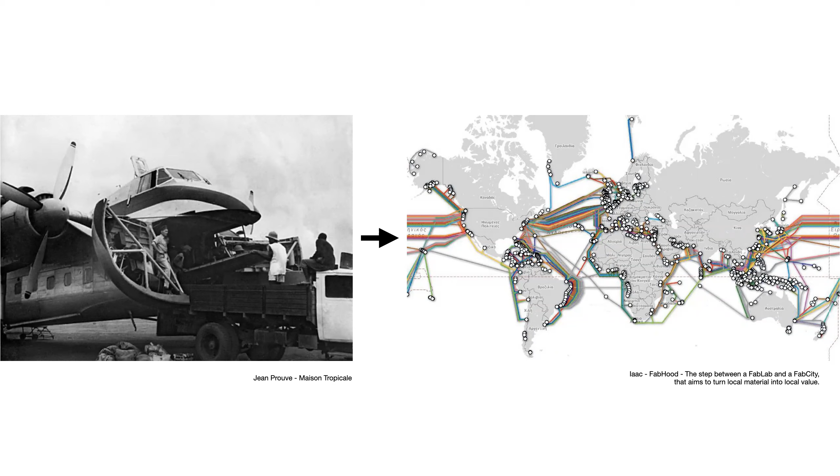However, thanks to distributed manufacturing, we could actually access a very similar machine and just send digital data over to that machine in any part of the world, and produce those parts for construction locally. I think that is a fundamental shift in the way we think about construction of buildings.

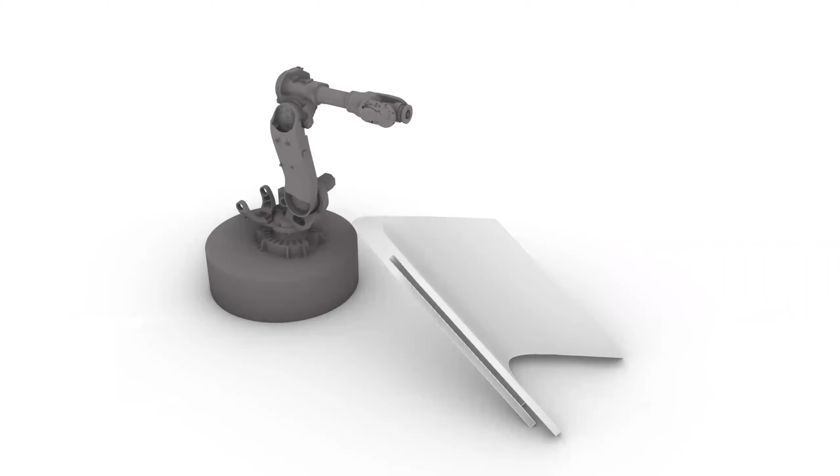And so this is just an example of a very simple piece that could be rotated and connected differently. And it could be very efficiently printed with a robot. So in this case, it's a 3-meter tall piece, just lower than the sculpture that I showed before. And it can produce all these kind of different configurations.

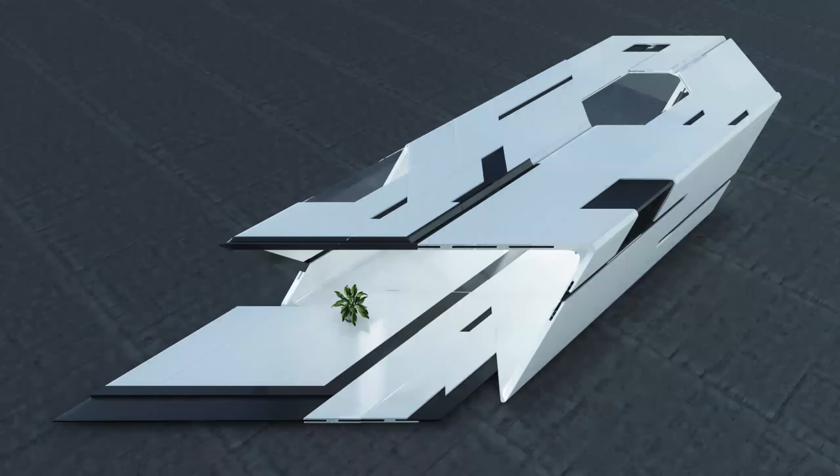So with a very short number or a limited number of pieces, you can actually produce not only larger spaces, but large variation of spaces. So these are the same pieces as this other prototype, right? And these are also starting to give interior qualities that, thanks to the material and to the assembly method, are completely novel, right?

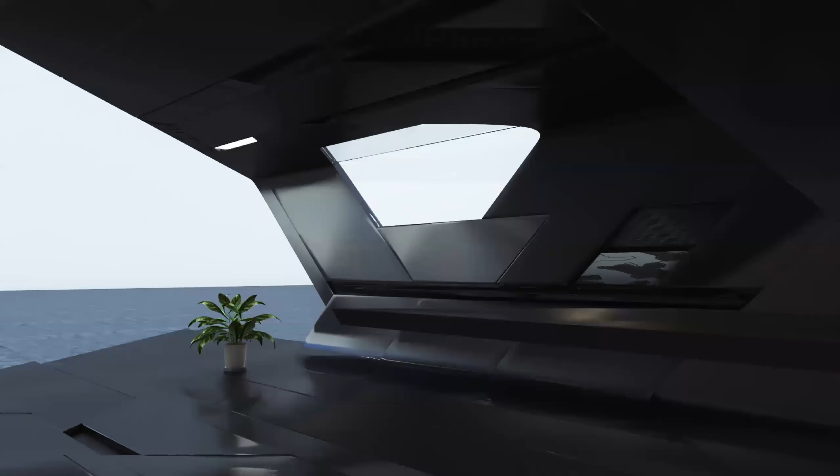And this is an inherently 3D printed architecture, yeah? And it's not taking any previous model and trying to replicate it through a different technology, but actually playing out the opportunities of this technology for creating a completely different design. And I think that is bringing new opportunities to the field.

And we hope we can actually start rendering this in real matter in the coming months when COVID is hopefully a bit more controlled in Spain. So that's kind of the last project I wanted to show.